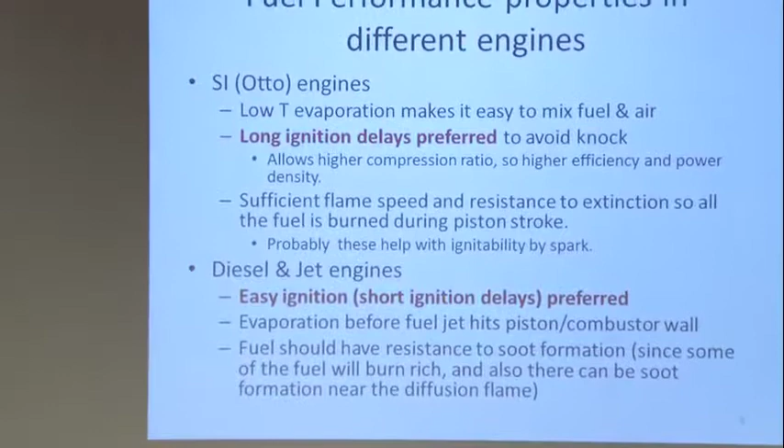You also need a sufficient flame speed, and you also need resistance to extinction so that all the fuel will actually burn up. You don't want to have fuel that you put in the cylinder that doesn't burn, because first of all, you're wasting fuel. And second of all, that unburned fuel is going to come out in the exhaust, and then you have to trust your exhaust control system to eat it up. And if not, it's going to go out into the environment, and then it's going to cause smog.

For diesel and jet engines, generally easy ignition is preferred. Like in a diesel engine, you don't have a spark, so you have to get the fuel to somehow light. So you need to have it be able to ignite. You compress the air first so it's hot, and you inject liquid fuel into hot air, very hot air.

And so at that temperature, you want the fuel droplets to all evaporate before they can reach the other side of the cylinder. Otherwise, they'll hit the cold wall, and there'll just be liquid film on the wall, and they won't burn. So it has to be volatile enough, low boiling enough, that the liquid will actually evaporate during that transit time from the fuel injector towards the wall.

And you want the fuel to have resistance to soot formation, because you expect that you're going to operate this engine where there's going to be a lot of regions that are fuel rich, because you're injecting unmixed fuel into air, and it's not well mixed. So you're definitely going to have regions that are fuel rich. And so you're going to have pyrolysis chemistry there, and potentially you could have soot formation. And that would be really bad if you make a lot of soot, because then you'll emit soot particulates. You might kill people from breathing in the particulates.

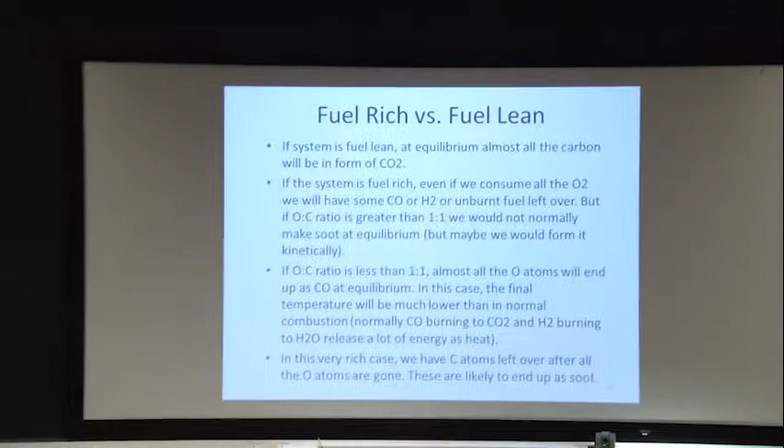Okay, fuel rich versus fuel lean. What do we expect? With a fuel-lean system, you expect that when you run to equilibrium, it's all going to be CO2, right? You have a lot of oxygen. All the carbon atoms will burn out to CO2. If it's fuel-rich, if you consume all the O2, you're still going to have some CO or hydrogen left over because there's just not enough oxygen atoms there.

But it turns out that if the O to C ratio is greater than 1 to 1, you don't really expect to make soot, at least not at equilibrium. Because what will happen is that all the carbon atoms will bind an oxygen atom because CO is much more stable than everything else. So the carbon really wants to grab the O. So if you get to equilibrium, it's going to be CO. And then the hydrogens will be left without a partner, without the oxygen, because they can't bind the oxygen as hard as the carbon does.

If the O to C ratio is less than 1 to 1, then you'll burn up all the O atoms, basically all to make CO, and you'll still have some carbon atoms left over. And then you'd expect to make a lot of soot because you have carbon atoms left over. You're basically doing pyrolysis there. You burned some of the carbon to make CO, got some heat release, and that heat is going to then pyrolyze all the rest of the fuel. And this is very prone to making soot.

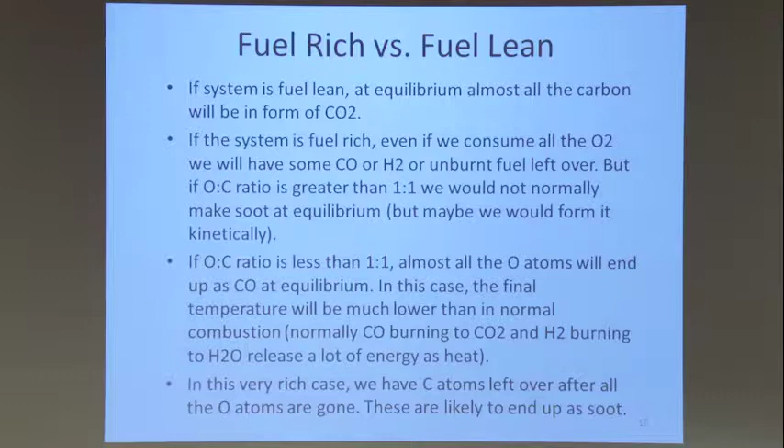Also, the temperature will be different. As you get more and more fuel rich, the temperature will get lower and lower because you have less oxygen or more heat capacity of this extra fuel that you're carrying around. So that's about it.

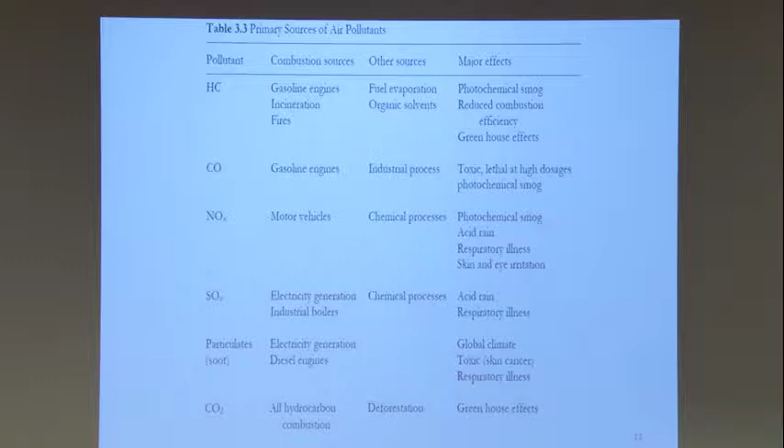All right, so air pollution is a major constraint on all the combustion devices. So we have pollutants that are hydrocarbons that go into the atmosphere. Some of these actually come from fuel evaporation, like in the gas station, or leaks in the refineries and stuff. That's actually a pretty significant amount. And then you can also have some that goes through the engine and comes out the tailpipe.

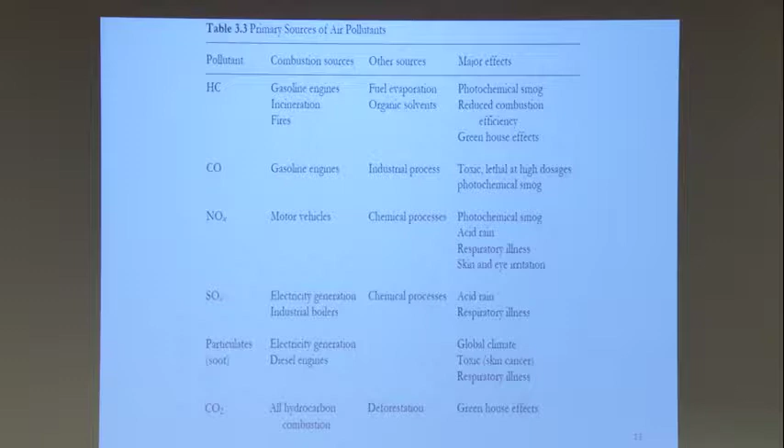It doesn't burn. What happens particularly is that if you have a crevice in your piston around the edge of the piston, that little crevice region is colder than the rest, and a lot of times it won't burn in there. So you have a little bit of fuel that gets jammed down into the crevice by the pressure as you compress it. That fuel never burns, and then when you open the valve, it gets emitted into the tailpipe. Some of it burns up in the exhaust system. Sometimes the emission control system can catch it, but some of it will leak all the way through.

The carbon monoxide emissions: as I showed you, the equilibrium concentration of carbon monoxide is still pretty high. Even if you run a stoichiometric flame all the way to completion, you'll still have some CO left over. That CO is going to go out. It's a toxic gas. You know, if you run a car in a garage, you might not live, right? It's pretty dangerous. Fortunately, it's relatively easy to do oxidation catalysts to burn up the CO.

So at the high temperature, at the end of the combustion, you have some CO there at equilibrium. However, as you cool it, the equilibrium favors making the CO into CO2. So as it's cooled into the exhaust system, the equilibrium is favoring burning up the CO to go to CO2. And if you have a catalyst to help that happen, then you'll burn the CO up to CO2. And both diesels and spark ignition engines in America, and I think in probably most of the countries, now have oxidation catalysts to burn up the CO.

NOx is made very much by motor vehicles, but also by stationary burners. And this turns out to be very important in photochemical smog. We'll talk more about that in a second.

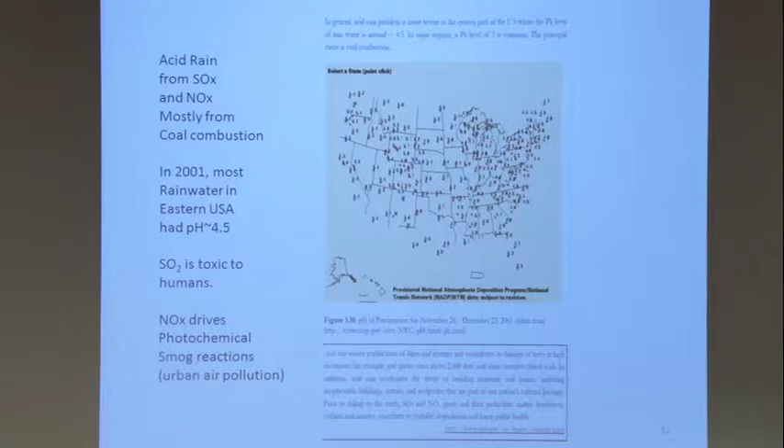All right, so this is acid rain. This is 2001. The rainwater in the US is typically pH 4.5, which is pretty strong acid. It's like vinegar. So that's not too good. And the NOx, the current concern about NOx is a lot about the photochemical smog reactions, which I'll talk about in a second.

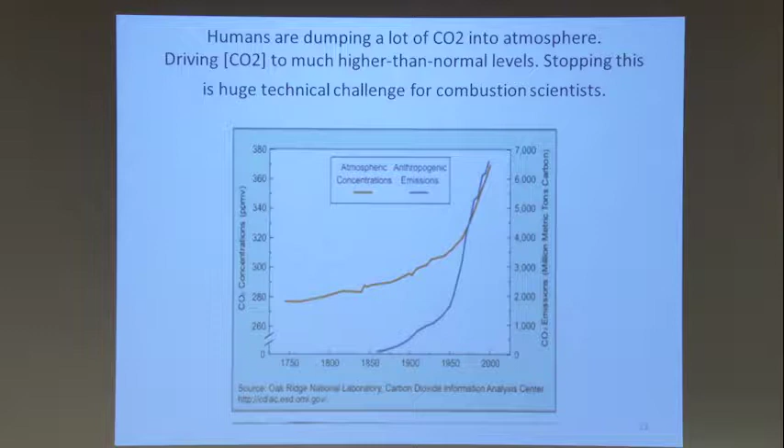However, what matters to the atmosphere is the integral of how much CO2 is dumped in, because once you put the CO2 in the atmosphere, it basically stays there. So if you wanted to actually stabilize the climate, you'd have to bring the CO2 emissions all the way down close to zero by the end of the century. That's really a challenge to figure out how to do. I think even achieving this is going to be reasonably hard, and it requires a lot of help from the technology, from the engineers.

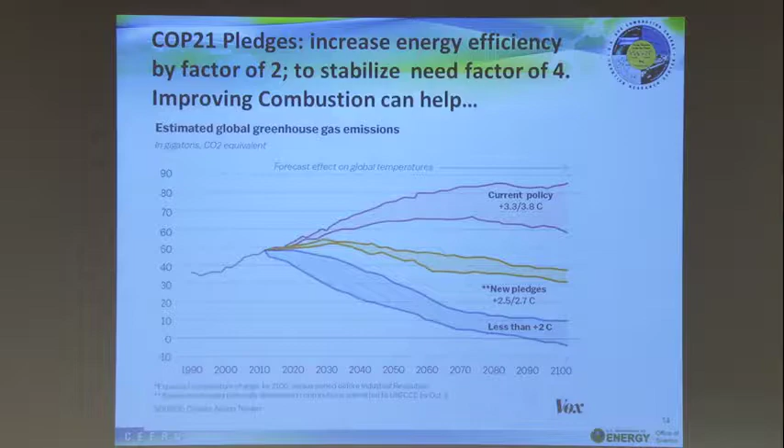And to get down anywhere towards here is a really big challenge. But that's sort of where we have to go eventually, or else we've got to build a heck of a lot of dikes because all the coastal cities will be underwater. And the agricultural areas are all going to move around as the temperature changes.

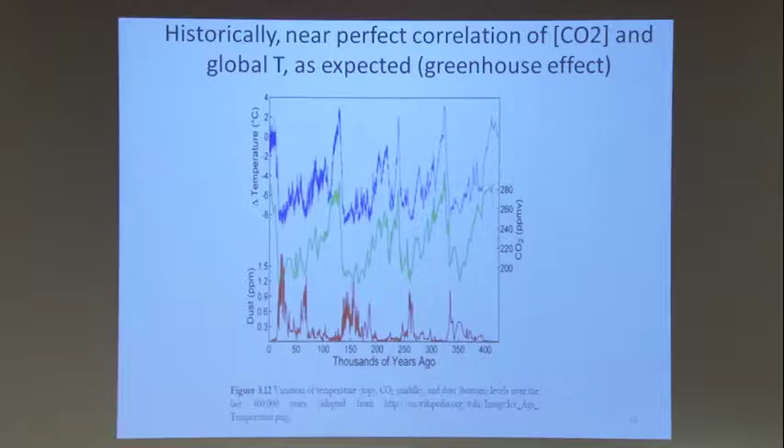Now, on the geological timescale, the variation that we're imposing as humans is not that big. The Earth has been hotter before. So it's not like the Earth is going to cease to exist because of the climate effect. However, species have gone extinct before, and we might be one of them. So from the point of view of us, it could be a really big deal.

From the point of view of the Earth, eventually there'll be some geological process. The carbon will go somewhere else. Eventually, it'll all work out. Some new species will evolve that can tolerate higher temperatures or something. So it's not like it's going to be forever, but it could be bad getting there.

And I surely don't know. But it's some number. And most of the world's governments have decided that they agree with that number. So that's basically what COP21 was all about, reaching an agreement on what's the real situation, how much CO2 can we really emit before we'll have a big problem.

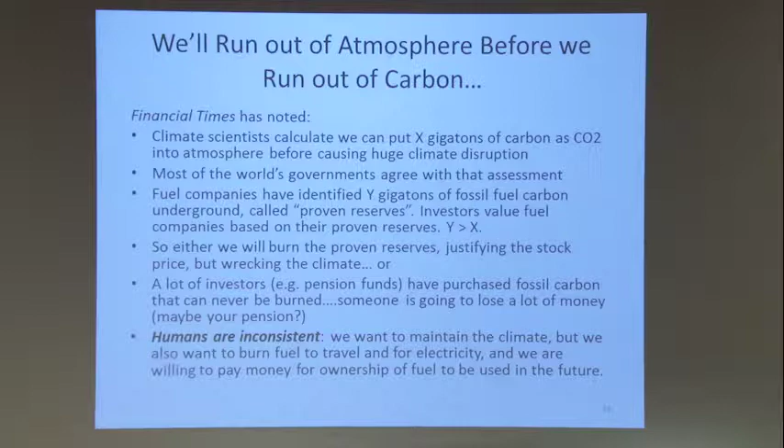So either the stockholders are going to lose a lot of money, or the people who own beachfront property are going to lose a lot of money, because they're going to be underwater, right, if all the fossil fuels are burned. So somebody's going to lose a lot of money here. But right now, if you want to buy a house on the beach, it's still really expensive. And if you want to buy stock in like Exxon or Saudi Aramco, they're about to sell their stock, you know, that's very expensive too.

So people are spending money to buy stuff for the future that's not really worth it. They can't both be right, right? And I'm concerned about this. I'm getting close to retirement age, and I'm thinking, oh, I wonder how much of my pension is invested in stuff that can never actually work out. That's a little bit of an alarming thought.

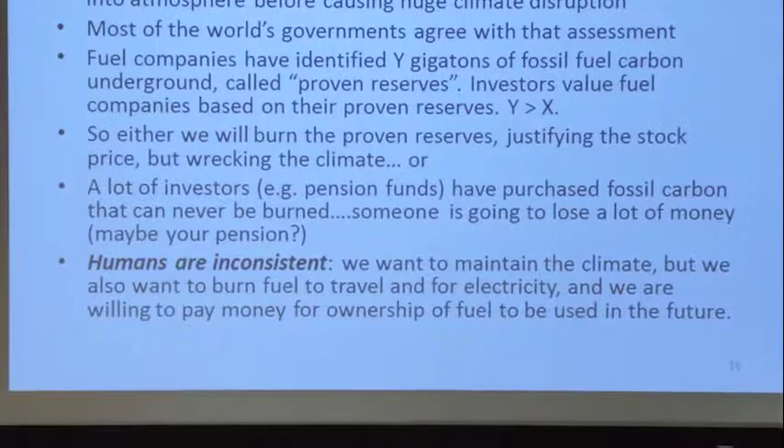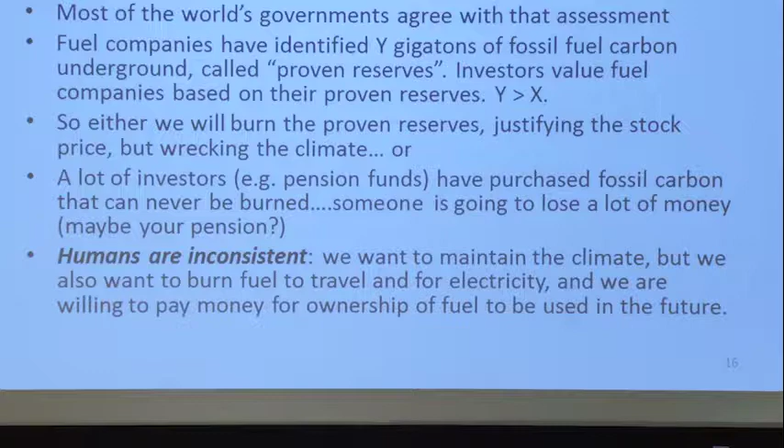And I would say that this is another example of my general observation of life, is that humans are inconsistent. That's how you can tell somebody's a human. If they're a robot, they'll be consistent. If they're a human, they're inconsistent. So, you know, we all want to maintain the climate, but we also want to burn fuel because we like to travel and we like to use electricity. And we're willing to pay money to own stuff to be used in the future. So that's the way humans are. And the fact that those things are incompatible and they can't both be right doesn't stop us.

All right? So I drove a car to get here, and I own stock in Exxon. And so, wait a minute, something's wrong, you know. I'd like to go to the beach. I'd like to have a beach house if I could, you know. So anyway, something's not quite right.

All right, that's the long-term problem. The shorter-term problem is that a lot of people are being killed by combustion-related particulates. And anyone who's ever in an environment where there's a lot of particulates in the air knows it's bad, right? People put cloths over their mouths to try not to breathe it. If they have some more money, they pay for fancy systems to clean the air in their apartments or whatever. Everybody knows it's bad. So presumably there'll be political pressure on the governments to try to change things to somehow get that under control in regions that have high particulate emissions.

There's really strong epidemiological evidence that particulate levels correlate with mortality. I think the causal relation of how the particulates kill people is not that well understood. But the fact that it does is not in debate. There's two big sources of particulates, actually three. In some areas of the world, it's actually dust. So they live near deserts. The dust storm comes in, you get a lot of particulates.

In a lot of places, it's particulates coming directly from combustion of biofuels or biomass. If you live in Singapore, you get a lot of particulates coming from Indonesia when the farmers do slash and burn agriculture, and they burn all the biomass. That's really horrible. It makes a lot of particulates. It causes a lot of trouble in Singapore. In a lot of places, it's fossil fuels making a lot of particulates.

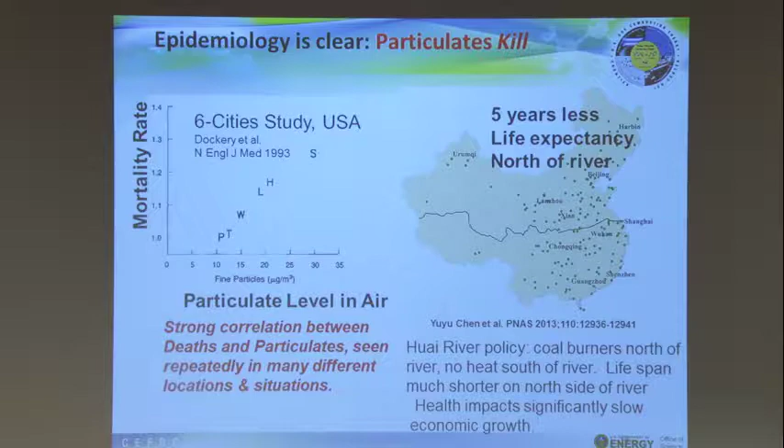And all they did is they went to the morgue, the people who give death certificates. And they said how many death certificates you did each day. And then they plotted from the weather station what's the particulate in the atmosphere today. And it's like a perfect correlation. So I guess what this means probably is if you're maybe close to death, you're sick, and then you get a bad particulate day, boom, you're done.

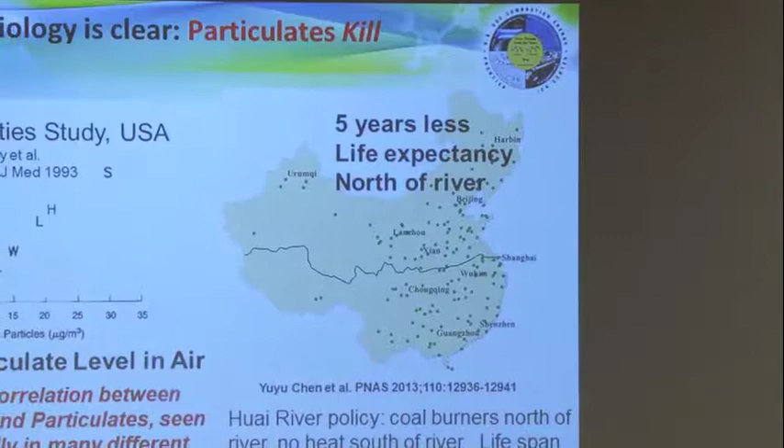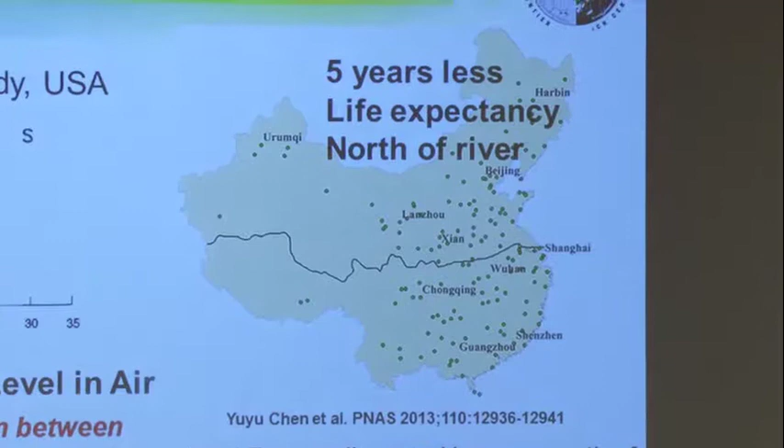This one is more chronic. China did an experiment unintentionally where they had a building code that was different north of the River Huai than it was south, back maybe 30 years ago, 40 years ago. I'm not sure exactly when they made this rule. And they said, when you build all the new houses here, we'll put in heaters. And they used to supply a solid fuel to burn in the heaters. And that's what most people use to heat buildings.

South of the river, they said, it's warm down there. No heaters. Too bad for you guys. So south of the river, like if you're in Shanghai, people used to wear a lot of clothes in the winter, many, many layers of clothes because they had no heat. So it was cold. People used to get frostbite, chilblains, all kinds of stuff, problems related to coldness.

They're like this because the parents put 15 layers of clothes on them. They can't move their arms up and down because they're wearing so many clothes. Okay? So they were complaining, but actually they were the lucky ones, because the ones in the north have 5 years less life expectancy north of the river, because they're breathing the particulates every winter from all the burners.

And so, I mean, this is a very good scientific experiment, right? There's a lot of people who live up here, and a lot of people live down here too. So you have a very good statistical sample. This is maybe one of the best epidemiology experiments ever conducted in the sense of being a perfectly firm conclusion.

It's kind of scary. 5 years is a lot, right? It's like, I don't know, 1/14 of your life or something. It's a very significant fraction of your life being lost because of poor air quality. And I just emphasize, this is data from USA, this is data from China. People are the same everywhere, and breathing particulates is bad wherever you are.

All right, so let's talk about pollutants. First, we're going to talk about NOx. So in the atmosphere, combustion devices emit NO. We'll talk more about how that happens. The NO comes out of the tailpipes, and it goes into the atmosphere. And in the atmosphere, HO2 is a pretty common species. It's actually formed from hydrocarbon oxidation. We'll talk about that in a second.

The NO converts the HO2 into OH. OH is a radical which is so reactive that even at room temperature, it can react fast. And it quickly attacks a hydrocarbon and makes it into a hydrocarbon radical, which then oxidizes, reacts with the oxygen. This reaction converts the NO into NO2. The NO2 absorbs the sunlight and goes back to NO.

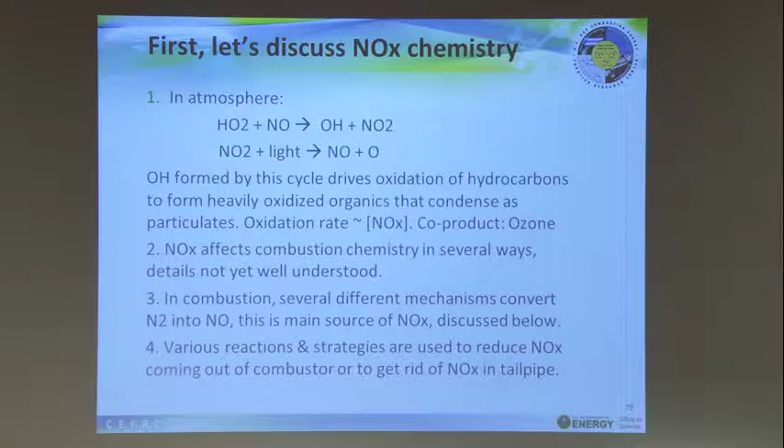So you have a cycle where the NO is going back and forth, and the rate of formation of the OH is proportional to the amount of NOx, the total amount of NO and NO2 you have in your system. The OH is basically 100% consumed by reacting with the hydrocarbons if you're in a polluted atmosphere. So if you're in a city, there's a lot of hydrocarbons, and the oxidation rate is just linearly proportional to the amount of NO.

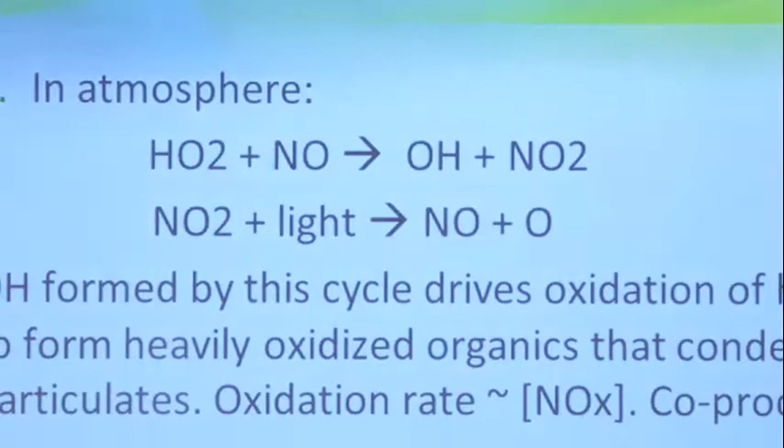As a side note, as a co-product, these O atoms react with O2 to make ozone. Ozone is also a pulmonary irritant. So in places with high NO, you're oxidizing your hydrocarbons, and some of that oxidized stuff turns into particulates, which are bad to breathe. And you're also making ozone. So places that have high particulates from secondary aerosols also have high ozone levels, and the sick people breathing them die. Okay? So that's what's going on here.

So this is the main reason we don't want to emit the NO, because this is a very serious health problem in the cities, and in some areas not just the cities. In the whole northeastern US and a big part of northeastern China, there's so much NO emitted from all the cities upwind that it all flows on top of them, and they're all breathing this bad air, everywhere. And this is catalytic; the NOx doesn't go away. It can blow along in the wind and still be bad.

Okay, the NOx chemistry affects combustion chemistry in several different ways, but this is not really well understood. There's a lot of empirical evidence that if you put some NOx into a combustor or an engine, the behavior changes, but it's not gigantic. And the chemical mechanism of how exactly this works is not completely worked out. So this is a current research topic.

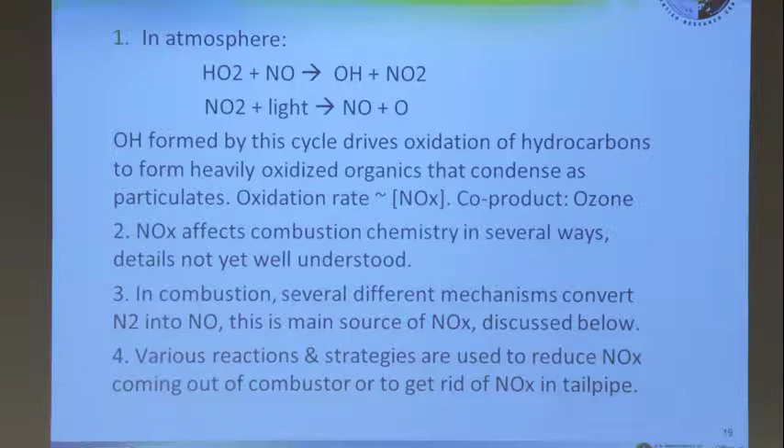All right. So how is the NOx formed in combustion? It turns out there's at least 4 different pathways that are comparably important. So this makes it very confusing, because it's not just one pathway, there's completely different ways. This one at the bottom has been known for a really long time, and a very smart guy named Zeldovich figured this out. He figured out that if you make O atoms, they can directly react with the nitrogen and make NO plus N.

This reaction is incredibly endothermic, because an O atom is a lot more stable than an N atom, or you have to break a triple bond here to make this happen, right? So this is really endothermic. But in combustion, you make O atoms from the combustion reaction, right? H plus O2 makes O atoms. So you have a lot of O atoms just after the combustion, and you have a lot of nitrogen, because that's what we have in the air. So you have plenty of reactants. And so even though the rate coefficient is slow, this actually is pretty significant.

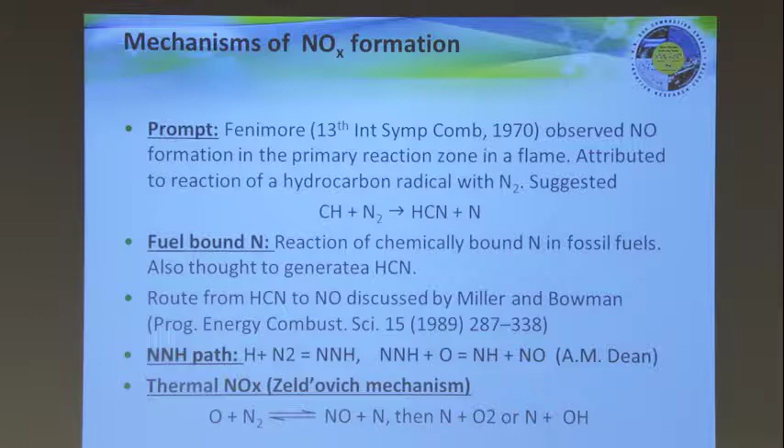And if you're in a stoichiometric flame, so at your adiabatic flame temperature, then this rate is actually the dominant source. It's the main source of NO. This was known for a long time, and then people thought, okay, the main thing we can do to try to reduce the NO is to try to lower the temperature. And so there's a whole set of strategies about how you can make sure that the peak temperature doesn't get too high. These other 3 are way more complicated.

Well, yeah, they're way more complicated. So you'd expect, if you have some nitrogen inside your fuel, chemically bound, then maybe somehow that can react to make NO. I would say that's still mostly not known very well. Maybe it makes HCN and the HCN burns, I don't know. So this is something that people observe. If I put a fuel in that has more nitrogen, I get more NOx, and it's a pretty significant effect. But a lot of fuels don't have very much nitrogen, so it's usually not a gigantic thing. But it's the same order of magnitude as these other paths.

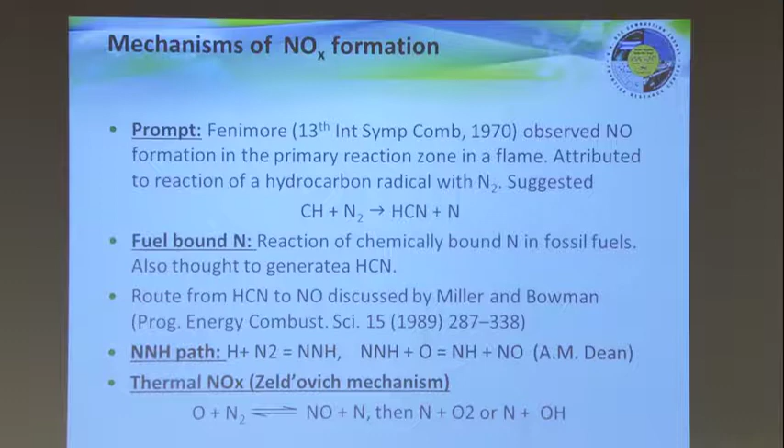In 1970, Fenimore wrote a paper where he observed NO happening right in the primary reaction zone in a flame before you get into the exhaust zone. And he figured that this should be some kind of hydrocarbon radical actually reacting with the N2. And he suggested that this was the reaction: CH plus N2 goes to HCN plus N. And that would be a way of making N atoms, which would then do the same kind of reaction to make NO. And the HCN also might burn and make some NO. We'll talk more about this. This was proposed in 1970. For sure, some NO is formed immediately, separately from this mechanism. But exactly how it happens has been kind of controversial.

And then very recently, another path was discovered where you have a lot of H atoms formed in combustion, and you have a lot of nitrogen. So you actually have an equilibrium with the species NNH, which is a really weirdo radical species, very short-lived. So you have an equilibrium concentration of this, and where you have a lot of H atoms, often you have a lot of O atoms, because you're making the O atoms by H plus O2. So if you have O atoms also present where this is present, you'll get some of this reaction. And this reaction is actually pretty fast, and it makes NO plus NH. Tony Dean proposed this reaction, and later some people did experiments and verified this is indeed true. And in very low temperature flames, this often is the dominant source of the NO.

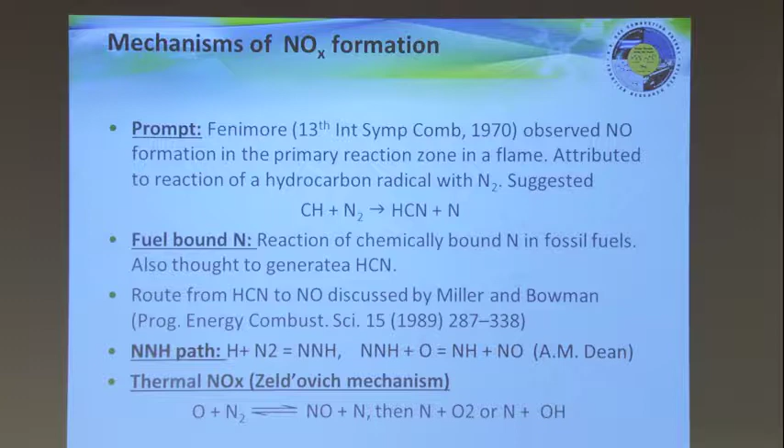All right, so here's your quiz question. So the thermal NOx production, the main reaction there is extremely endothermic. So it has a gigantic EA, because remember EA is always bigger than delta H of the reaction. And so it's extremely sensitive to temperature.

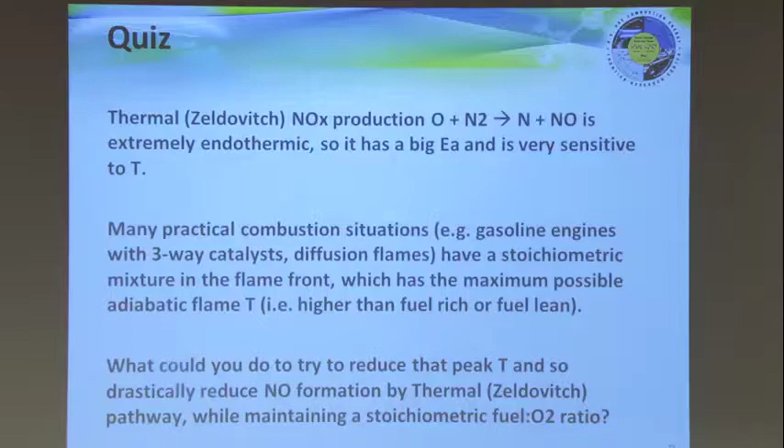Now, in many practical combustion situations, both in gasoline engines and also in diffusion flames, the flame front's happening right at the stoichiometric mixture, so it has the highest possible temperature it could have. And so therefore, you get the highest possible rate of this reaction, which is really bad, and you make a lot of NO.

So I want to know, what could you do if you're locked to have to do your combustion at stoichiometric? What could you do to try to reduce that peak temperature and then therefore reduce the NO formation rate? So talk to your partner, see if you can figure out an idea of what you could do.

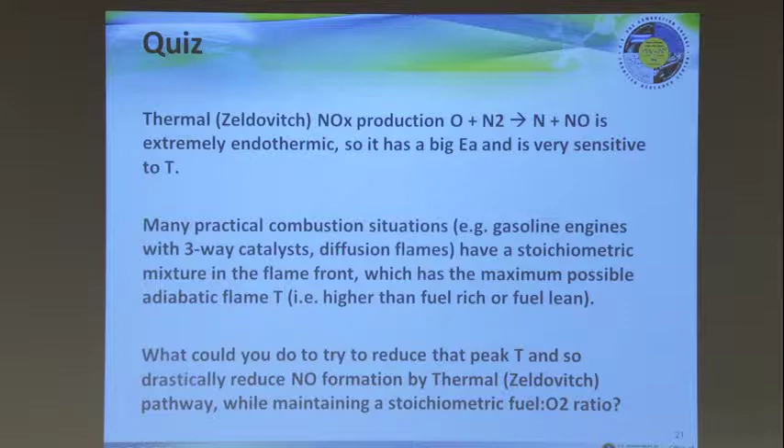If you made it higher oxygen concentration, you'll make the temperature higher and you get even more NO, unless you go all the way to having pure oxygen to get rid of the nitrogen. So some people try to do that. It's definitely a possibility. Assuming you could use the excess energy. Yeah. So people right now are usually thinking of doing it for stationary sources, where you could have a lot of equipment to separate the oxygen and nitrogen. It wouldn't matter because it's not. But on a vehicle, it's kind of a challenge to figure out how to do it.

All right. Does anybody have a suggestion? How can we run a stoichiometric fuel to oxygen ratio and still keep the temperature lower? So what was the first one? Inject water. Inject water. That's one idea. EGR. EGR, so exhaust gas.

So the general idea is if you can add something else, so you have to keep the fuel and the air in a certain ratio, but can you add some more material to increase the heat capacity? Then the adiabatic flame temperature will be lower. You'll have the same enthalpy from the reaction, but you divide it by a bigger heat capacity, so then the delta T will be lower. So that's the main idea for cases where you're locked at stoichiometric, is to try to just add more heat capacity.

And so people do all these things. Some people inject water. Some people in cars, almost always, they do exhaust gas recycle, where you take some of the exhaust gas, which has CO2 and steam, and you'll try to mix it back up with your fuel-air mixture to try to keep the temperature lower. All right.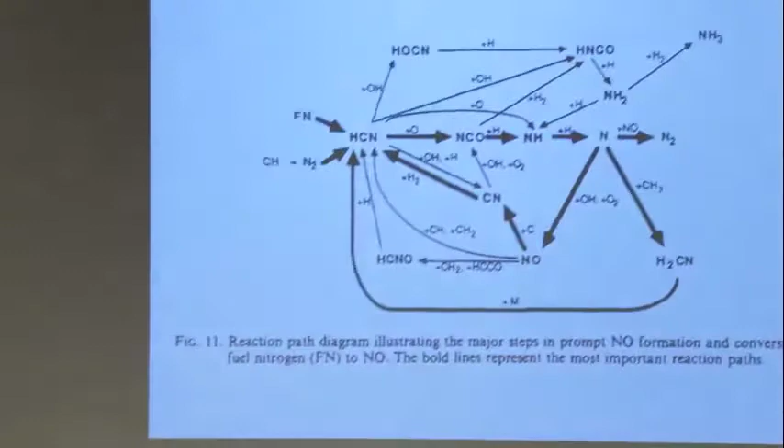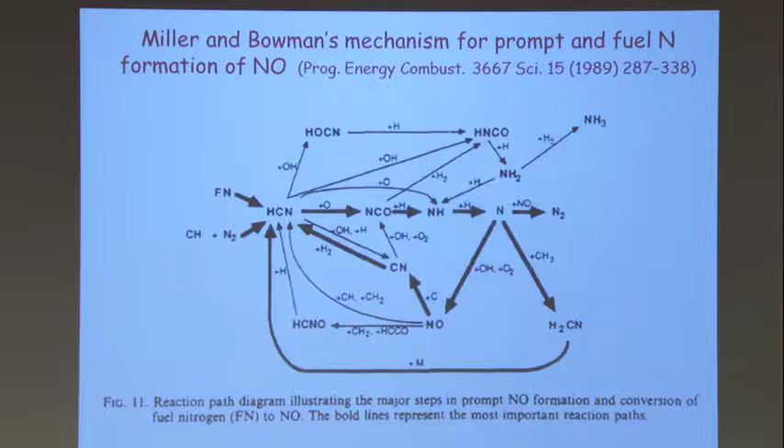All right. So if you get into this nitrogen chemistry, the paper that you have to read first is this paper by Miller and Glarborg. And they went through a lot of different reactions of nitrogen and nitrogen chemistry, reactions that could lead to NOx. And they came up with estimates and sometimes calculations of some of the reactions and some experimental data. It's a nice review article, and it has discussion of where all these numbers come from. And they had a pathway like this that they worked out.

And you can see it starts out by CH reacting with N2 to make HCN. And then a whole bunch of chemistry that eventually makes some more NO somewhere. I don't know where NO is. Here it is down there. So there's a pathway that goes this way to NO. And then they also even studied how you can try to get rid of NO by some other reactions later. And so if you do get into this field, you definitely have to read this paper first. So this is the baseline understanding.

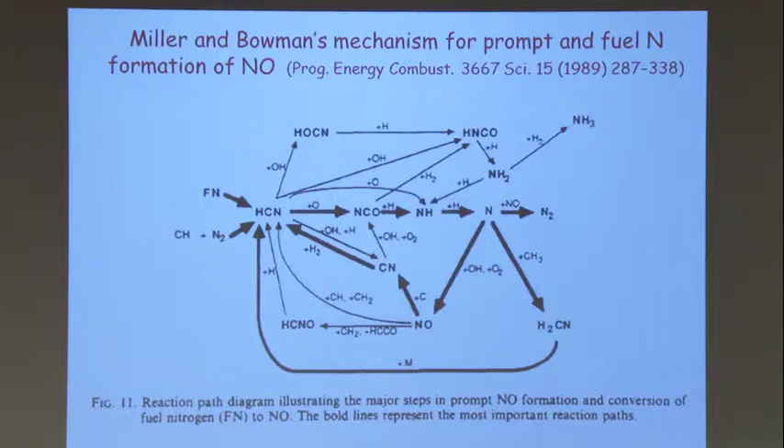There's another, actually, I should have the citation. There's another paper, it's a chapter of a book by Anthony Dean, A.M. Dean, in a book by Gardiner that's all about these reactions and has like 100 of the reactions discussed in detail about what the rates are, what's known about them, what the products are, estimates, pressure dependence, all kinds of details about it. So this Miller and Glarborg is the first one to read. And then when you want to know about the specific reactions, Dean's chapter in Gardiner's book is the second one to read.

This CH plus N2, the very first step in the Miller-Bowman mechanism, was measured by several people, but really what they're measuring is the loss of CH. So CH is a radical, and you make some CH and you react it with N2. It's pretty easy to put N2 into your reactor, and then you can measure the rate with pseudo first order. And there's pretty good agreement between the experimental data.

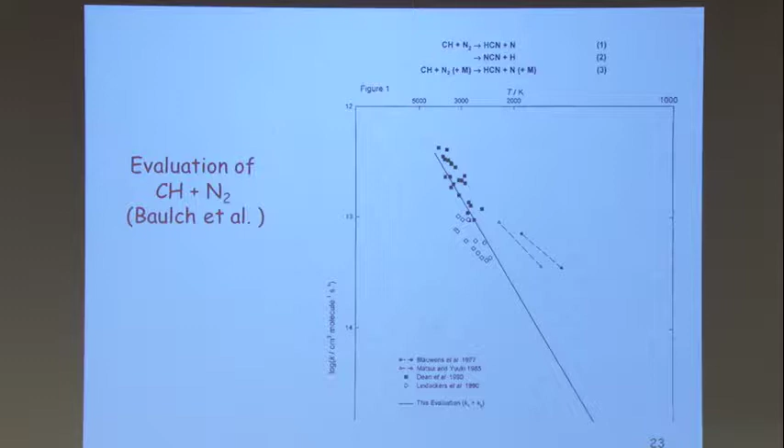And so Baulch made a recommendation of what the loss rate is. But notice that they wrote down that they didn't know what the products are. So it could be HCN plus N, it could be NCN plus H, maybe something else. Baulch is a person, but he was the head of the IUPAC committee that was evaluating all of the reaction rates. So if you look in the committee's recommendation, that's what they said.

But that's completely different than Miller and Glarborg. Miller and Glarborg said the product should be HCN. This has really big consequences for the subsequent chemistry. But that's what the theory said.

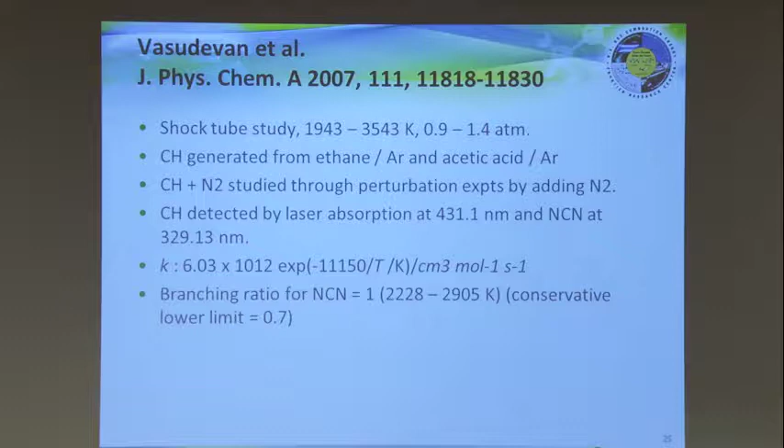So then in 2007, Vasudevan, I'm probably mispronouncing his name, did a shock tube experiment and was able to detect the NCN directly using a laser at this particular wavelength, and found that the branching ratio towards NCN is basically 1. They said at worst, at least 70% of the flux must be going to NCN, but they think the number is 1. And they have the rate coefficient and everything. So it turns out Lin's calculation was correct, and Miller and Glarborg was wrong.

Now this is a big problem in this field because Miller and Glarborg is like the Bible of what this reaction is supposed to be. But it turns out the very first reaction in the sequence is incorrect. It has the wrong product. So this caused a big uproar.

Okay, so now it's known it's NCN. And since then, this is 2010, so the last 7 years, there's been a whole ton of papers, people trying to figure out, oh, we have to redo all the mechanisms. It's all NCN instead. It must be doing something else. And so that's the status right now. I haven't quite caught up to the story, but probably graduate students today are trying to figure out what NCN reacts to make, and what all the reactions and rate coefficients are.

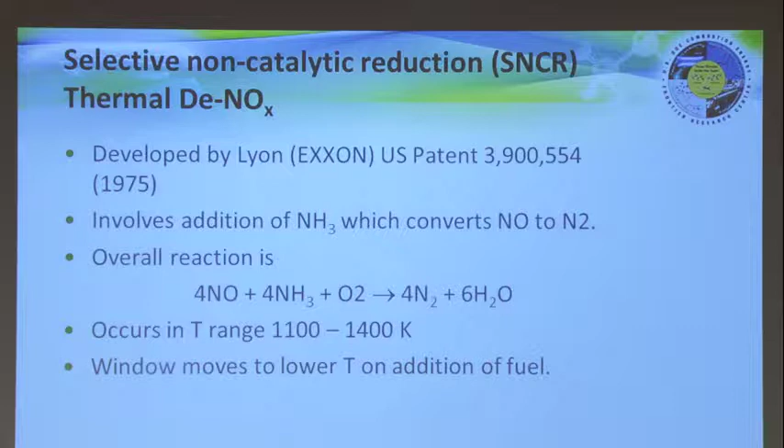So do you do this in addition to lowering the adiabatic flame temperature, so you minimize the NO? Yeah. So I think in the modern trucks in the U.S., they do a lot of exhaust gas recycle and other tricks to try to reduce the amount of NO that's coming out. And then they also do this to try to get rid of some more of the NO. And they must have a very complicated control system because as you accelerate or decelerate, the amount of NO coming out is going to change a lot.

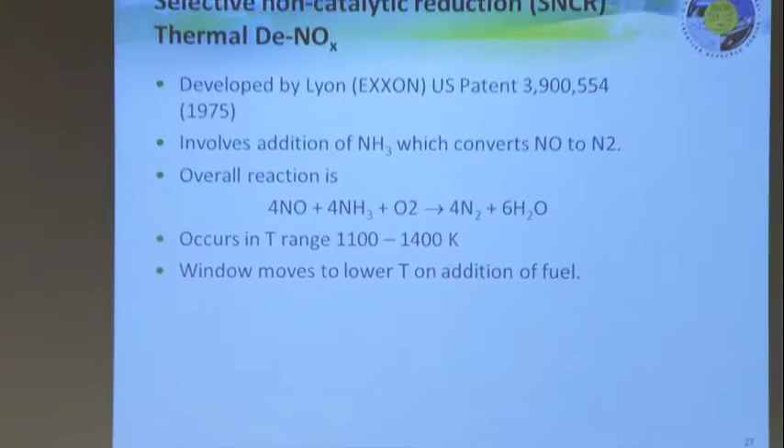The flow rates coming out are changing. And so there's quite a complicated whole system there to try to get it under control. But the standard is very tight, so you have to do a lot of things in order to do it. I'm sure they don't do anything they don't have to do. So, yeah. And I think Mercedes has one called BlueTEC. Have you ever seen something called BlueTEC? I think it's all this emissions control system.

Here's the reaction. The key reaction is NH2 reacting with NO to make nitrogen plus water, but it has a competing reaction that makes NNH, which might go on to actually go back to NO. And so the ratio between these two products is very important. In fact, it was observed right at the beginning that it can't be 100% to N2 because some of the observations indicated you keep on making radicals. You're not just making stables. And so Miller and Glarborg knew about that a long time ago. Here's a paper from 2001 about this. People were studying this for quite a while.

But the side channel that makes the NNH wasn't that well known. NNH is really hard to measure because it immediately falls apart to N2 plus H. But they figured out how to do it, and so several different groups tried to measure this over quite a broad temperature range, and also to measure the total rate very well, because it's quite important for understanding the emission control system, so you can control the amount of NO emitted.

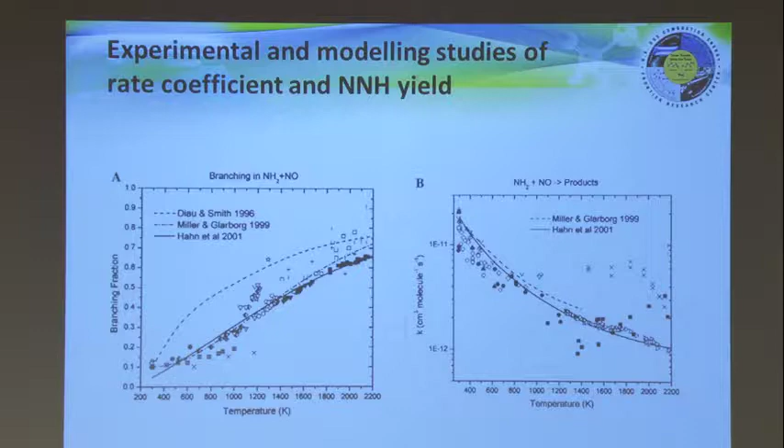And then following all this, people have developed fancy burner types to try to control the NO. This is called a reburn design, and what they do is first have a combustion zone, probably fuel lean to begin with, then fuel rich because they add some more fuel, then finally some more air to have a diffusion flame at the end.

And by now, you're using the exhaust gases from the earlier combustions as your source of heat capacity to make the final temperature in the diffusion flame small. And also, you've burned most of the fuel before you get to the diffusion flame, so that the enthalpy release is less.

And so this turns out to be a really good design for getting low NOx. Of course, it's complicated to get all the flows right. You see how many different streams there are? And you have to have all these flows just right so that you get a stable burner, stable flame, and you keep the NOx under control just because you keep all the ratios right.

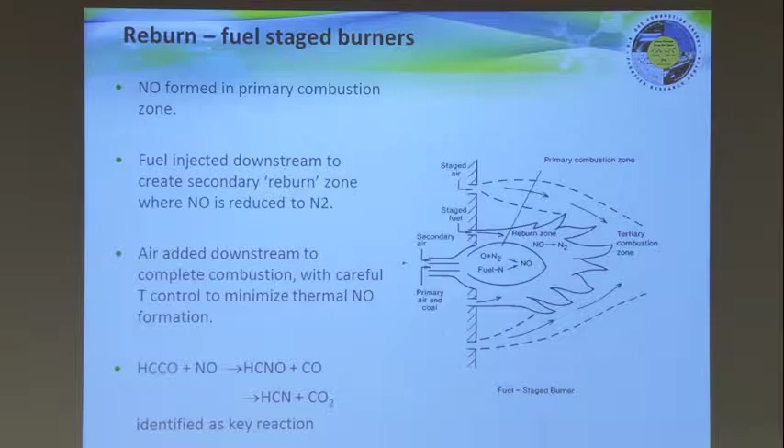And basically the idea is to avoid ever having a case where you're having a really stoichiometric mixture with no diluent burning, because otherwise the temperature would be too high and you make the thermal NO. It turns out in this system, they figured out that this particular reaction was super crucial for calculating how much NO they had. So then a lot of people spent a lot of time measuring this one.

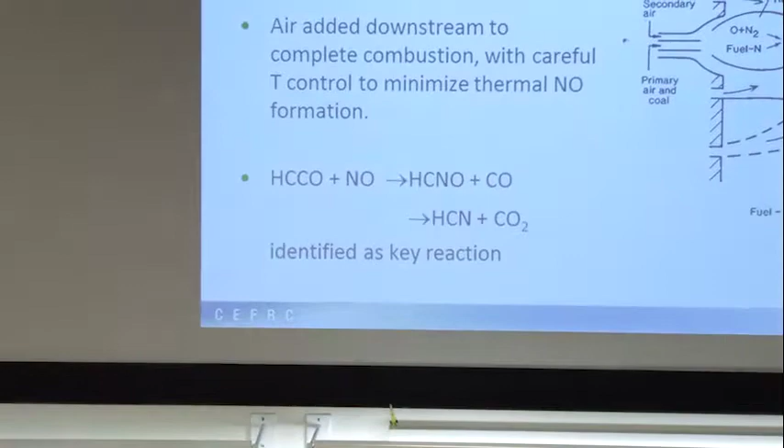All right, now let's talk about ignition chemistry. So there's two different types of ignition that you'll run into in combustion. One of them is induced ignition, where you force it by a spark or a laser pulse. And basically, you just blast some mixture that has some fuel and some air in it to some incredible temperature with a plasma, and it is definitely going to burn.

Okay? And then the key from that is you start at a little volume of it burning, and does that little volume propagate and expand to make the whole thing burn, or does it blow out after it's burned? And I'm not going to talk about that problem at all. It's a very important problem, but I don't know much about it.

And I'd say, in my opinion, a lot of that's about the combustion physics stuff that Professor Matalon's talking about. It's about if you have a little tiny flame ball, does it expand or not? If you have it under a turbulent flow, does the turbulence blow it out? Stuff like that. What I'm going to talk to you about is the chemistry version.

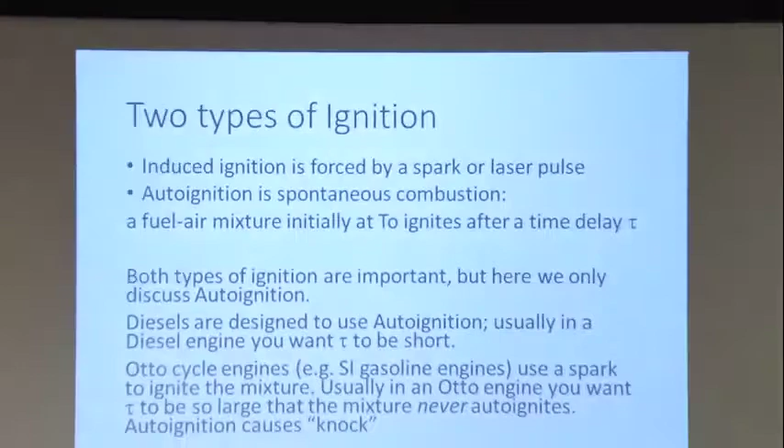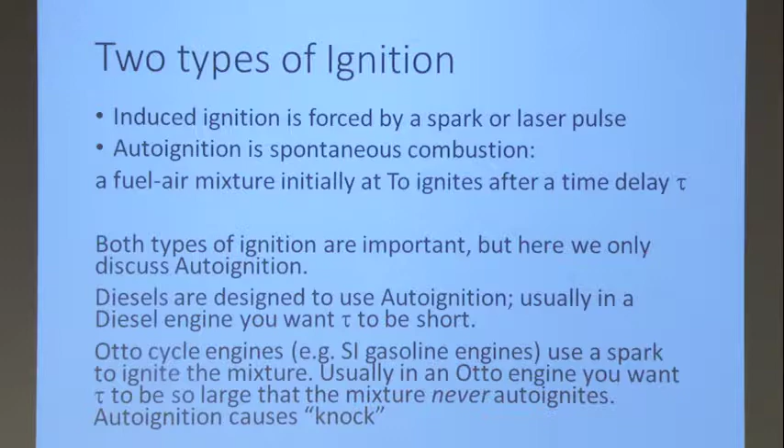The chemistry version is called autoignition. It's where you just spontaneously combust something by mixing up a fuel and air mixture at some temperature. And if you're above a certain temperature, called the ignition temperature, the flame's just going to ignite. Diesels are designed to use the autoignition. And usually you want the ignition delay to be very short in a diesel. Whereas Otto cycle engines, they don't want autoignition to happen, so you want the tau to be super long.

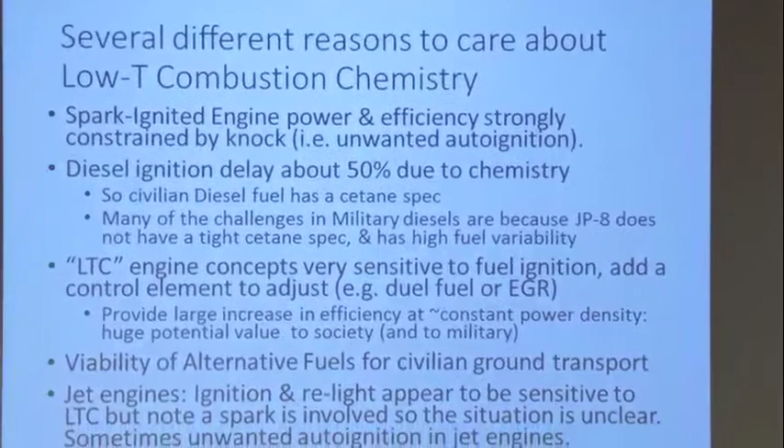Okay, so there's several different reasons. The spark-ignited engines are constrained by knock, so anything you can do to make the ignition delays longer will help. For diesel engines, about 50% of how diesels work is controlled by this chemistry of the autoignition. There's another whole 50% that's controlled by mixing and flows and stuff like that, which I don't know anything about. So I'm just going to talk about the chemistry part. If you really want to understand diesel, you have to understand them both because they really couple together. And then when you bring in alternative fuels, you have to worry about this a lot.

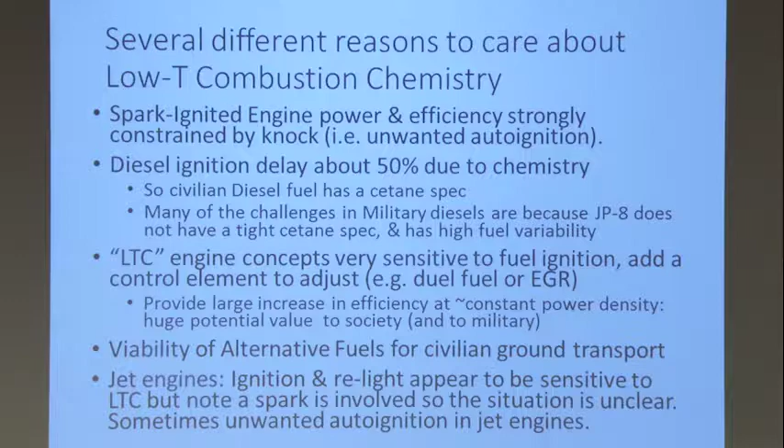And then there's a lot of interest in these things called LTC engine concepts, where you're trying to intentionally make the fuel burn at very low temperature so the emissions will be very low. And also you can make the fuel economy better because you have less heat losses if your peak temperature is lower. So there's a lot of concepts of trying to do that.

And in those concepts, many of them rely on compression ignition, autoignition, to ignite it, because often you're at a condition where the flame speed is so low that if you lit it with a spark, it wouldn't actually propagate across the cylinder in time before the piston moves up and down. So you have to do volumetric combustion by autoignition.

Because this is really important, this topic has been studied a ton, but it's still a problem. That's why I'm teaching it today. But if you want to know about it, you have to go back and read these reviews. And these review articles are really good. PECS means Progress in Energy and Combustion Science. That's like the main review journal. For the kinetics part, Comprehensive Chemical Kinetics is the main review journal.

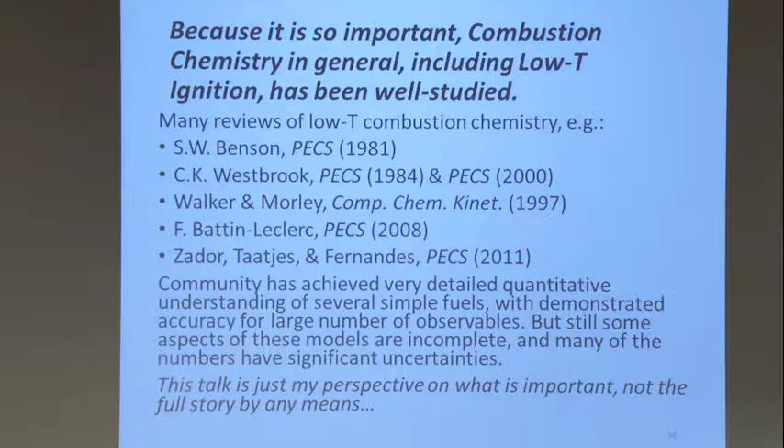And I'd say that there's a very detailed quantitative understanding of a couple simple fuels that really works, but a lot of problems at the low temperature part. And I'm just going to talk about what I think is interesting and important. And you really should read these articles, and these are like hundreds of pages of text, so I'm sorry, there's a lot of material.

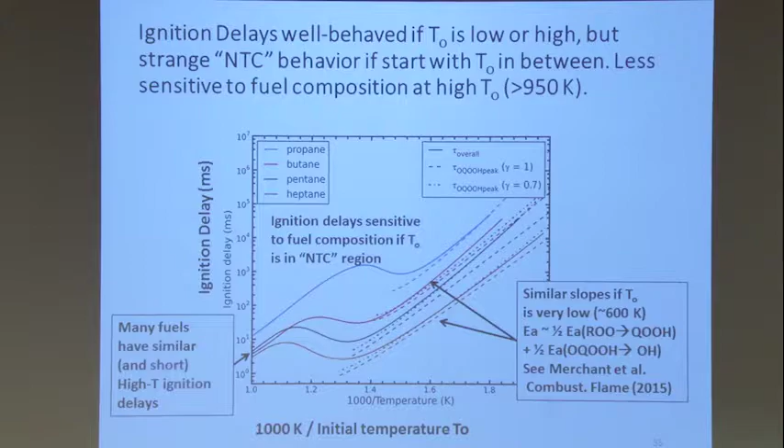And I'm measuring the time delay between the time that I jump the temperature up to whatever my initial temperature is, and the time before I see the hot flame. And that time can vary over orders of magnitude. So this is from 1 millisecond up to like 10,000 milliseconds. Okay? So 4 orders of magnitude variation in this ignition delay. And this is one of the properties that's most sensitive to fuel. A little tiny change in the fuel can make a gigantic change in this ignition delay.

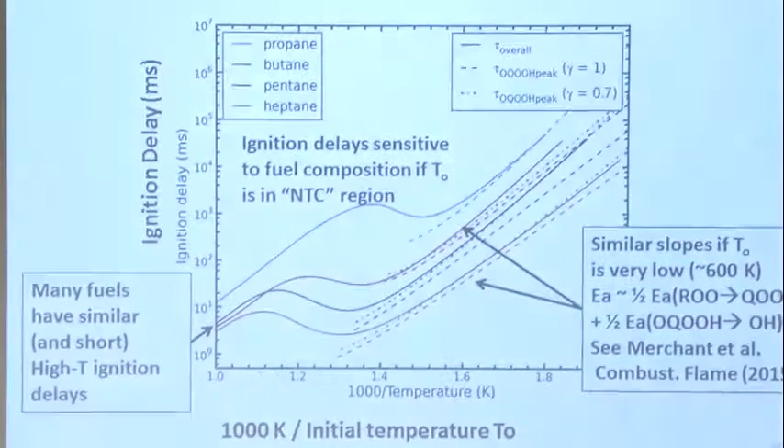At low temperature, these are pretty much straight lines on a log versus 1 over T plot. And so this is like Arrhenius behavior. So you have Arrhenius behavior at low temperature, and you also have Arrhenius behavior at high temperature. So at low temperature and high temperature, it looks kind of like normal chemistry. It's Arrhenius. In between, it's backwards. The ignition delay, you heat it up and you make it take longer to react, which is totally against all rules of how things are supposed to be in the world. But that's the way it really is.

So you have this thing called the negative temperature coefficient region, where the slope is backwards on these plots. And so if you want it to ignite sooner, you should actually cool it down, which is really strange. But it's important to keep track that this temperature is the initial temperature. And all of these traces go through the entire range from the initial temperature all the way up to really high temperature when they burn. So you're seeing the beginning point of a long time trajectory of all different temperatures. All right.

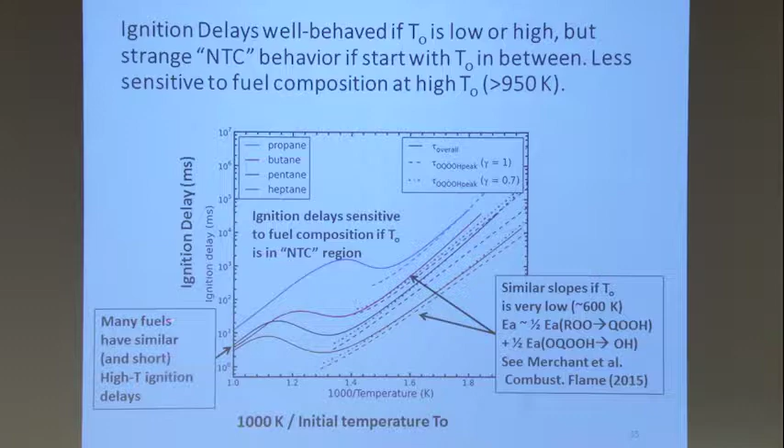Up at high temperatures, the small molecule chemistry explains everything. And you can run the models, it just works. If you want to, you can look into it and figure it's all about how the fuel breaks down to make H atoms. The H atoms do H plus O2. It's all pretty straightforward. A lot of models can predict this correctly, and this is really well understood. Down at this low end, you can get a correlation that this effective EA is approximately the average of the EA for 2 different steps. And you can read about this in a 2015 paper by Merchant, where they figure out why that behaves that way. In between, I think we don't know yet what's going on.

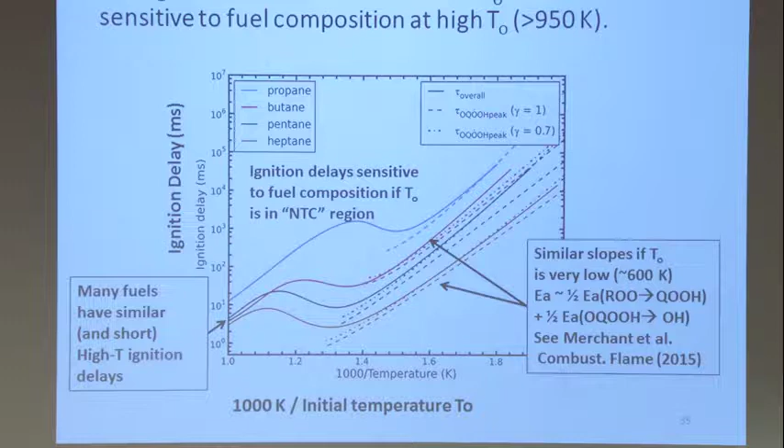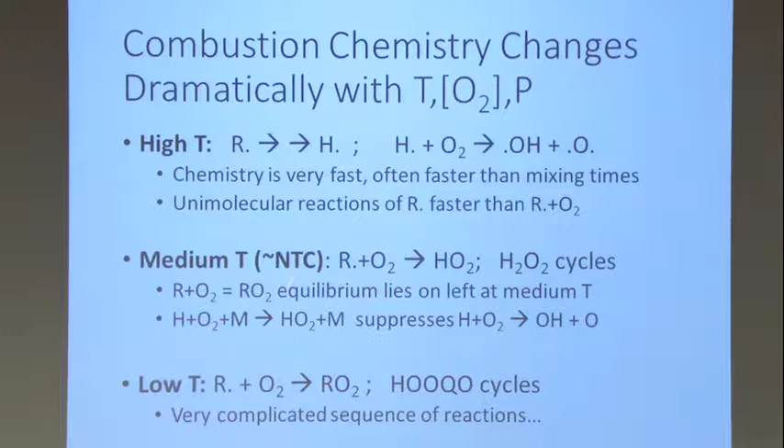All right, so at high temperatures, pretty much well understood. And the issues here are all about complexity. So if you have a real complicated fuel, like a real diesel fuel or jet fuel, you just have a lot of species. But really, fundamentally, we understand it. So they're going to break down, and then the small molecules react the way we know, and H plus O2 dominates everything. And basically, we know it. And it's really, I think, no problem. It's just like getting your computer program to work better for the more complicated fuels. However, there are problems about soot. We'll come back to that later.

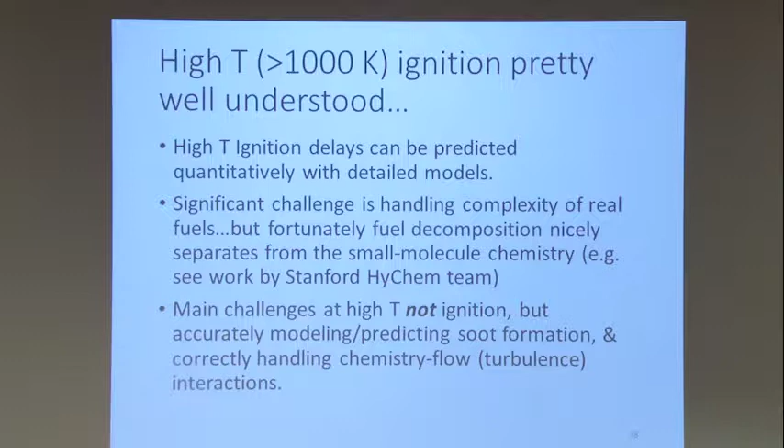Ignition is really about chemical amplification. It's about if you have one radical in, do you get more than one radical out? Once you get to that, you'll have fast reactions and explosions. If that doesn't happen, the chemistry will stop. If you get fewer than one radical out from one radical in, then any radicals you put in the system will disappear, and the chemistry will just stop.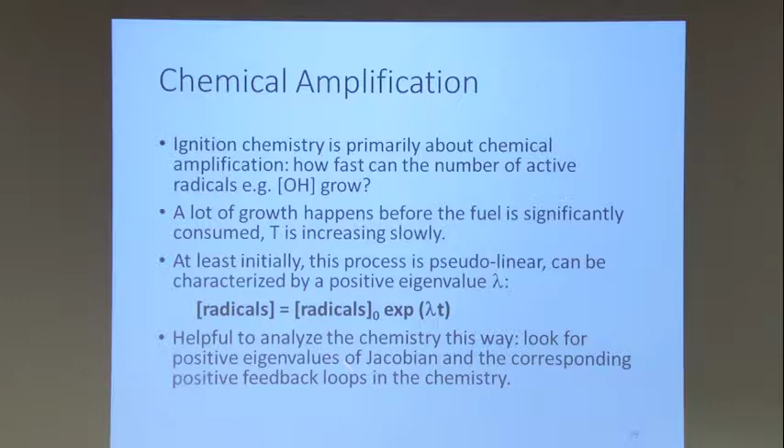At least initially, when things aren't changing very fast, you can say that the radicals, if you have positive feedback, will have an exponential growth. And then you can worry about what this eigenvalue is of the exponential growth. And that's a critical thing for setting the time scale for how fast the ignition will happen. So you can look in the Jacobian, look for positive eigenvalues of the Jacobian of the right hand side, the source term. And if you see a positive eigenvalue, you have positive feedback, and then you can work it out.

Okay, let's do medium temperature. Medium temperature, what's critical to get positive feedback is this amplifier. And the way this works is that I have an HO2 radical. If it reacts with a fuel, I have two of them, say, then I react with two fuel molecules. I can make 2 moles of H2O2 and 2 moles of R. And then the R's will react with oxygen. R plus O2 goes to HO2 at these conditions.

And so I had 2 HO2s to begin with. I made 2 radicals, and I got back to 2 HO2s. So this part is not making any radicals. It's just cycling around. But I'm creating H2O2 as a product each time I go around. And the H2O2 thermally decomposes to make 2 OHs. And so now I have more radicals. So I have positive feedback. Every time I go in this green path, I get amplification of the number of radicals.

However, these guys could also do this other path where the HO2s react with themselves. They make 1 H2O2, and then this has no positive feedback. So the blue cycle does not create any radicals. It just goes around and around without making any radicals. But the green pathway does make radicals. So the green reaction here, HO2 plus RH, this is the critical reaction for chain branching, for making radicals.

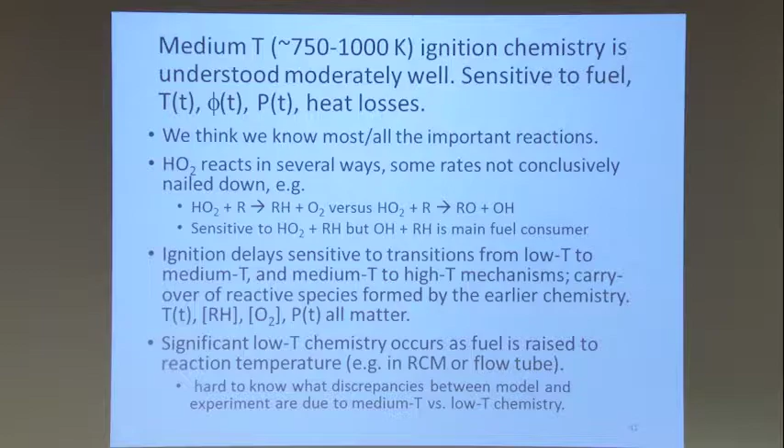And this thing is usually happening in the middle. There's a low temperature chemistry, there's this middle temperature chemistry, and then you go to high temperature chemistry. The coupling at the two ends, as you're transitioning from low to medium or from medium to high, can be quite complex. So from a modeling point of view, it's a little bit complicated. If you see a discrepancy, you're not sure what to blame. Is it because my low temperature model is bad? My medium temperature model? Or my high temperature model? You're not sure which one, because you'll be sensitive to things at all the different steps.

The last one is low temperature chemistry. I'll try to do this kind of quickly. So low temperature chemistry, people have worked out the main reactions, and this is the main sequence that makes radicals. So this is the chain branching: if you get a radical, it makes an RO2, it isomerizes. The isomerized thing adds another O2. This thing isomerizes again. It makes a diperoxy thingy, which falls apart and gives a radical. This thing again falls apart and makes 2 more radicals. So you get 3 radicals out for 1 radical in. So that's your chain branching.

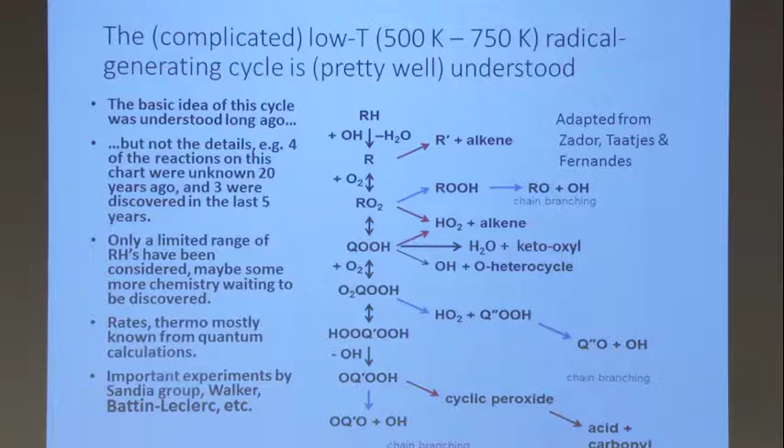But you can see this is kind of complicated, and we call these things R and Q because they can be all different kinds of structures. Each one of them has different rates for every step. Many of these steps are reversible, so you have to worry about the thermo. And then there's a whole bunch of side reactions. The radicals can just fall apart. The radicals can react bimolecularly. They can fall apart a different way. This is what happens at medium temperature. This guy can also fall apart this way. This guy can do some different things, make water. It can go some other way.

And some of these reactions are chain branching. Some are chain propagating. Some of them are chain terminating. And they're all competing against each other at the same time. So this has been very confusing for the experimentalists to understand. And also, until I think 2 years ago was the first observation of this.

I think these guys have never been observed, these two species here. Some of these have been observed, I think. I think these have never been observed. So this is a lot of chemistry where no example of the key species has ever been observed. So this is where you have to trust the quantum chemists that they know what they're doing. And so that gives a lot of experimentalists heartburn.

And we keep discovering new reactions. So three of these reactions on this plot were discovered within the last 5 years. Nobody had any idea. So I was involved in one of those. This pathway here, one of my students discovered. Nobody knew about it. So the one to water was discovered by people at Sandia. All right.

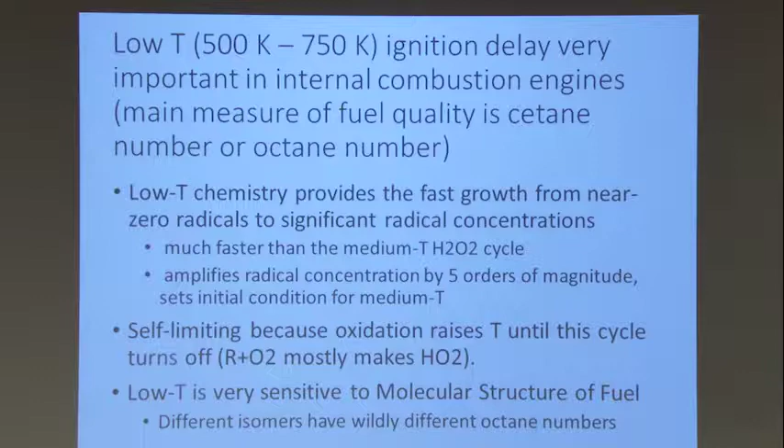This turns out to be very crucial, though, for the ignition delays at low temperature, which is very important for the knock. And this chemistry is really weird. It's a very strong radical amplifier, but it turns itself off because when the temperature goes high, some of the equilibria run to the left. They don't run to the right anymore. So some of the reactions stop running. So it's like it runs, it makes a lot of radicals, and then it gets too hot, and it just stops. So that makes it a little confusing, too.

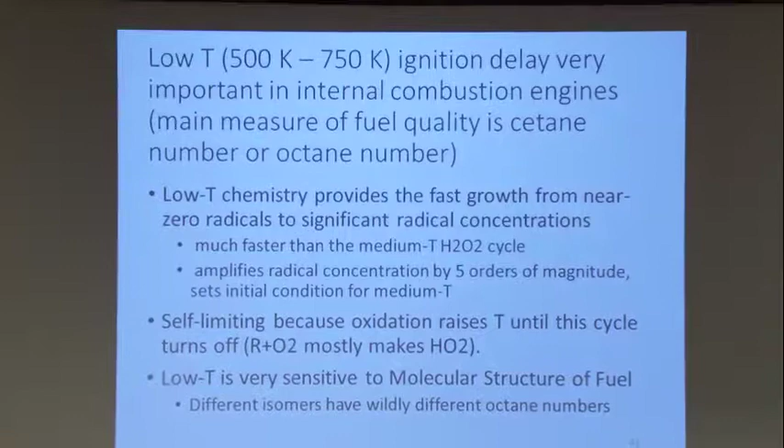And also, it's wildly sensitive to the molecular structure because each of those reactions has different thermo and different rates depending on the molecular structure of the fuel. So the teeniest tiny change in your fuel molecule can drastically change this ignition. And it definitely is not understood.

Empirically, people had to work on this for a long time because they have to sell fuel, right? And they have to put a number on it. So they put this octane number on it. And then they made up this model called a blending octane model. And I would say basically it doesn't work. But they try. So if you do little perturbations of your fuel, you can get a little change in the octane number, make a prediction.

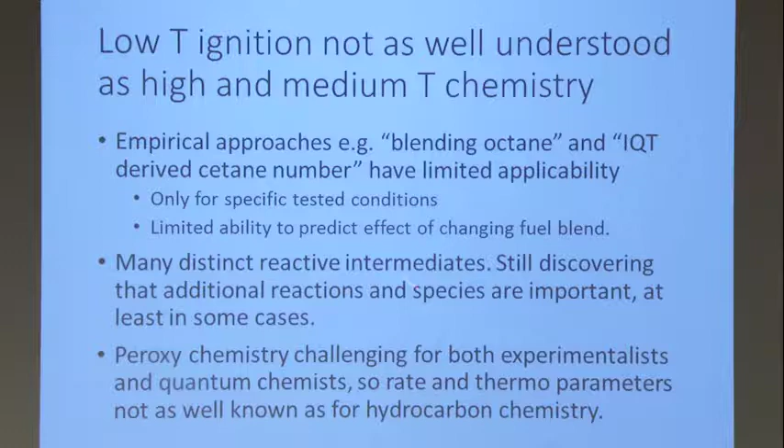Then recently, a lot of people do this thing called IQT-derived cetane number. Anybody do an IQT? I think some people in this group. Anybody? IQT? Yep. OK. So that's a gizmo you can buy. It's a way to measure an ignition delay. It's something like a diesel engine. So it gets numbers that are correlated well with a diesel engine, so well that people use this actually to determine the cetane number, which is the rating of diesel fuels.

But it's not really the diesel engine. And exactly why it's different, we don't really know. And it's kind of not a very fundamental test. Both these tests just measure some time in some apparatus, but they don't explain to you why the different fuels do different things. And it's only in this very specific condition. And then the peroxy chemistry is a big mess. We don't know the parameters that well. We don't know all the reactions.

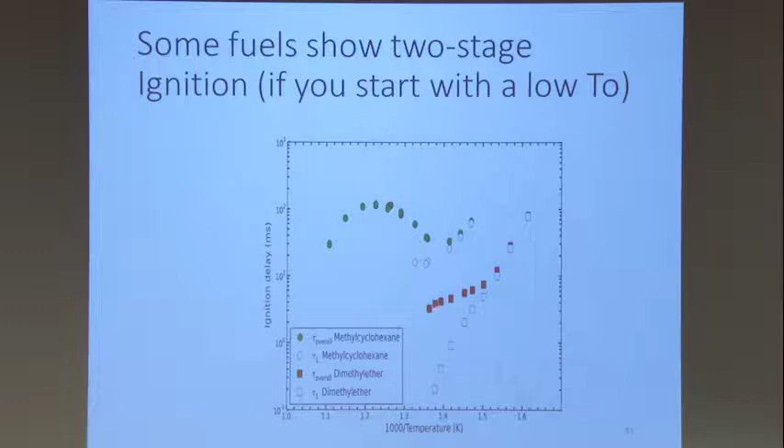We're working on it. Some fuels show this two-stage ignition if you start with low temperature, where you see something happens in the temperature at a certain point, and then a little bit later, the big explosion happens. And what that is, is this little kink in the temperature. The temperature goes along, and nothing's happening, and all of a sudden it gets a little bit warmer, and then nothing happens for a while, and then kaboom. And that's what you observe experimentally.

If you measure a pressure trace in a closed system, you can see the pressure goes up a little bit after a while, and then it doesn't do anything, and then all of a sudden it gets super high and explodes. And if you could measure species like OH, you could see that they're exponentially rising at one exponential rate, and then later they rise, not quite exponentially, and then they go down, and then they don't do much, and then they go up again. It's really weird. So this is very complicated chemistry.

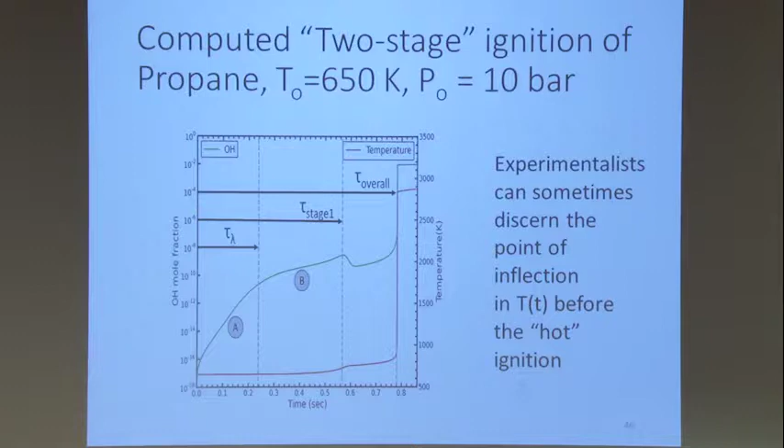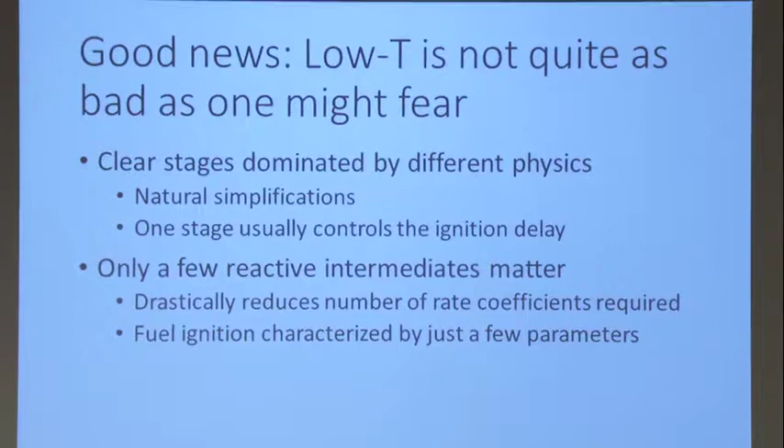But with the new spectroscopy methods, people can actually see this, and they can see the different rises. So you can see the OH going up and down, just like the models say it should do. All right, so the good news is there's clear stages. We understand this a little bit. And also only a relatively small number of species matter. It's pretty many, but it's maybe 20 or 30 species, not 10,000.

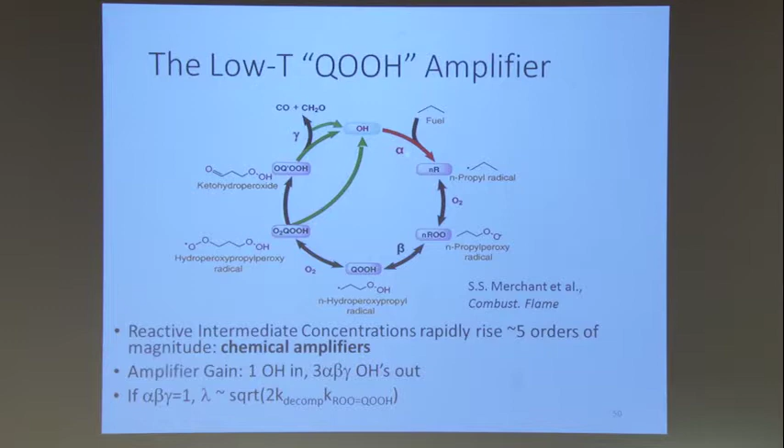And you can see the stages in the species profiles. You can see the rates, and you can write down the amplifier for how this is working as a cycle. You can see fuel comes in, and you have some branching ratios, alpha, beta, gamma, that are telling you how much of the radicals are staying in the cycle and how much are leaking out. That'll tell you how the gain changes.